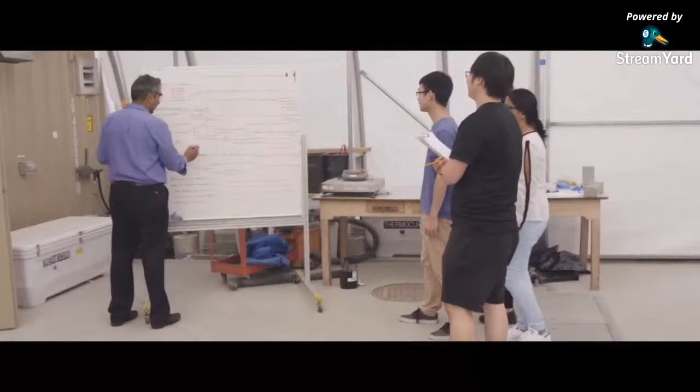Rishi joined the civil engineering program at the University of Victoria as one of its first hires and brought with him a wealth of engineering and teaching experience. His efforts were quickly recognized as he received some of the highest teacher ratings in the faculty and was presented with the faculty's Teaching Excellence Award in 2015. He has served as director of the undergraduate program in civil engineering since 2016.

One of the things that I've tried to do is have many undergrad students hired within my research lab, so it's not just fundamental research, but something that's applied and used in the field.

Dr. Gupta had a very great teaching style. I would never forget his class. It was second year civil engineering materials, where we had a lot of time in the lab, a lot of hands-on experience there. It was an experience I'll never forget.

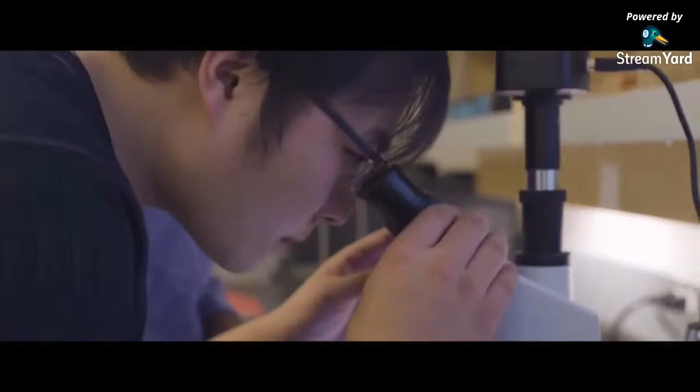He is recognized across the nation as a leader in academia, inspiring young minds to reach for more and continually challenging themselves. Rishi's outreach to elementary and high school students has helped foster greater interest in engineering from youth, and he serves as a committed steward of diversity and inclusion in the profession.

In 2012, he was recognized by the Women in Engineering chapter at BCIT for his support.

The issue is also at the back end, having children between kindergarten and grade 12. We need to promote science and engineering at that level. We need everybody: we need women at the undergrad level, but we also need women to go to grad school, and we need women to come back and be role models in the teaching profession and in the engineering profession.

Engineers and Geoscientists BC is proud to present its Teaching Award of Excellence to Dr. Rishi Gupta.

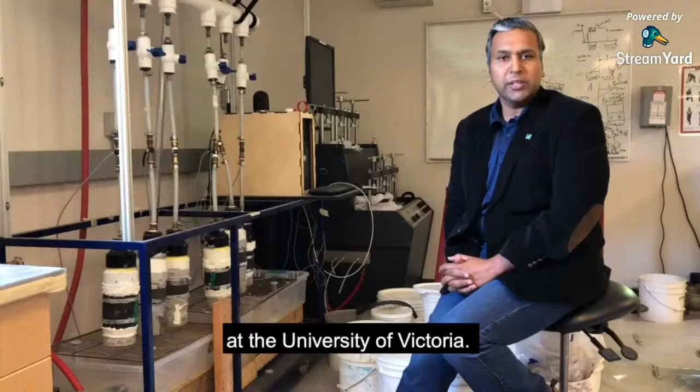Hello everyone, my name is Dr. Rishi Gupta. I work in the Department of Civil Engineering at the University of Victoria. First of all, I sincerely hope that all of you watching this video are keeping safe during the pandemic.

The one project I'm extremely excited about at this moment is focused on coming up with a novel type of coating that can be applied on different surfaces so that the novel coronavirus cannot stick to them. The one application we have in mind is for wash basins. We are hoping these wash basins can be deployed at public places, especially at the entrances and exits of malls, schools, and recreational facilities. I hope by the time we finish this project, we can make Canadians a bit safer than they are.

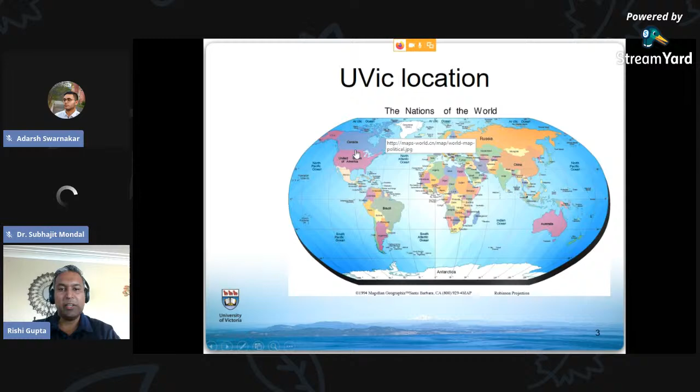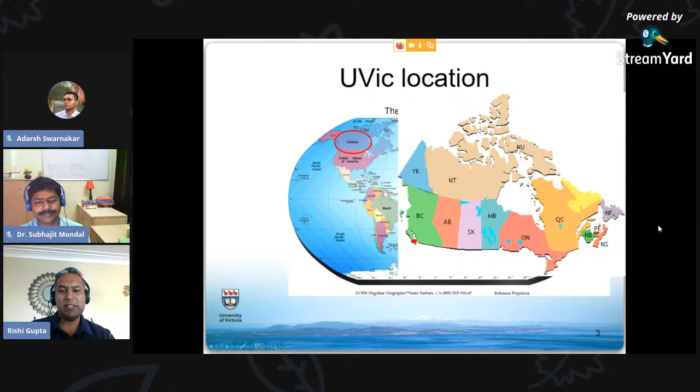I wanted to give a quick snapshot of where we are located. Of course we share a pretty long border with the United States. If I zoom into this a little bit, the University of Victoria is located in British Columbia, and we are actually at the southern tip of Vancouver Island. So that's the location of where we are. With that little geographical mapping of UVic, I'll begin with the presentation.

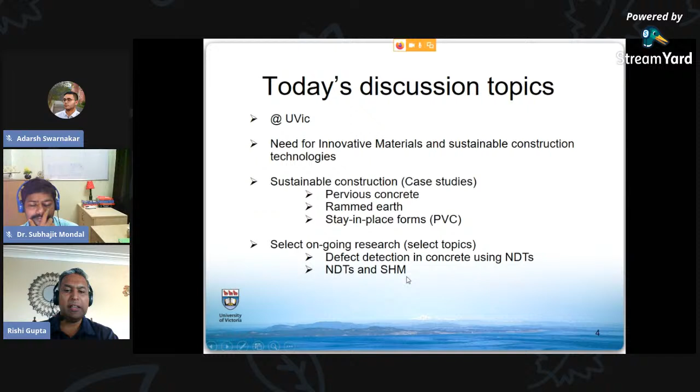I have a couple more slides to tell you a little bit more about University of Victoria. We'll get into what exactly is the need for innovative materials and sustainable construction technologies. Then I have three case studies that I have cherry-picked for the presentation today: one on pervious concrete, or porous concrete, one on rammed earth, and one on a SIP system - a stay-in-place concrete forming system. Hopefully, if we have time, I want to try and keep this to about 45 minutes, I'll get into a little bit of non-destructive testing and structural health monitoring.

Let's talk a little bit about University of Victoria while I have the opportunity. UVic is located in the capital of British Columbia, in Victoria. We have roughly about 20,000 students on campus, and a very good graduate and undergraduate program. Within engineering, we have several disciplines, but we of course have civil engineering included in the list as well - civil engineering was actually one of the newest programs to be added at the University of Victoria. And while I have the opportunity, I want to recognize that we've actually had several NIT Rourkela students coming to Canada over the past few years.

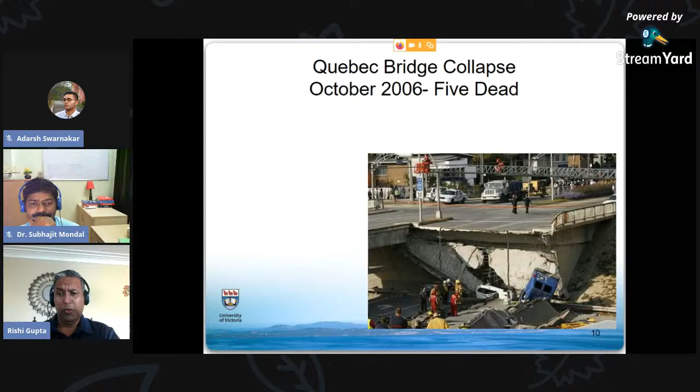This particular one I really like, because there was a lot of controversy behind why this bridge collapsed in Quebec, Canada, in 2006. The mystery is that blame was laid on poor construction, poor design, and deterioration of the bridge, and so on.

Then we have, many of you may have seen these photographs, the Minneapolis bridge in 2007. There were quite a few people injured in this, 145 people, and 13 people died in this collapse.

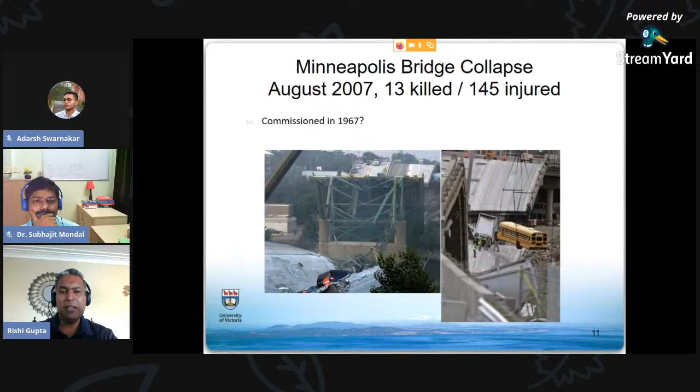So we need to address some of these issues.

If you look at the financial side of things, many of my numbers are actually outdated. I don't expect you to read all of this, but I'll point your attention to one statistic: the infrastructure deficit in Canada alone for bridges is estimated at about $8 billion. I think this number has gone up over the years, but if Canada had to fix all the structurally deficient bridges, we would need about $8 to $10 billion to do that. So that's a pretty hefty number.

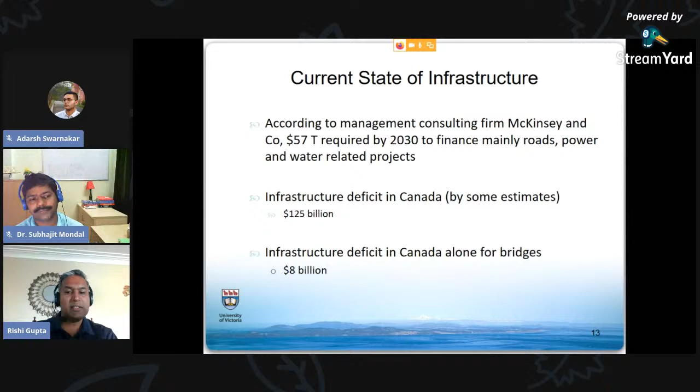I also have this statistic for India. This was the finance minister back in 2013, Mr. Chidambaram, and he had put the infrastructure deficit for India at $1 trillion. These numbers are very staggering, and we as civil engineers need to think about, first, what's going wrong; second, how do we find out what's wrong; and third, how can we in a very sustainable fashion fix some of these issues?

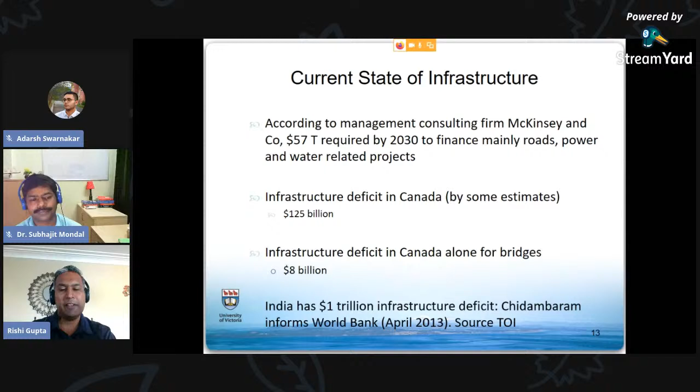So with that, I want to move on to what exactly is the solution.

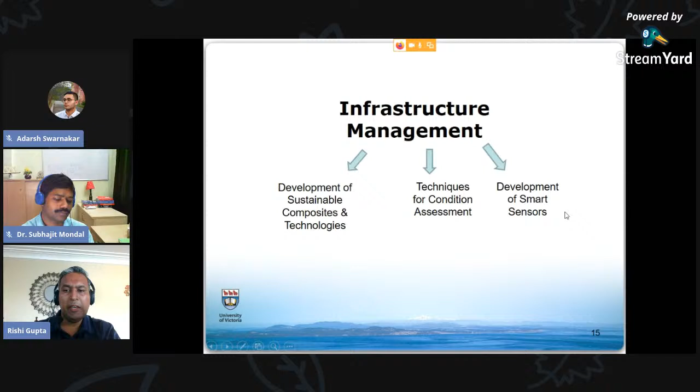Finally, we are doing a lot of work on smart sensors. How can a sensor do more than one thing? So if there's a sensor measuring strain, in addition to strain, can it actually monitor anything else for us? There are interactions between these.

Many of you may have heard of LCA, often referred to as LCC, life cycle costing or life cycle assessment. We do a bit of work on this, not too much. Finally, where LCA and development of smart sensors interact would be called structural health monitoring of both new structures and repaired structures. There's a light line showing different interactions.

I won't spend too much time on this. In today's topic I will try and focus on sustainable construction technology, which will be the main focus of the presentation. If I have time, we'll touch a little on structural health monitoring as we move forward.

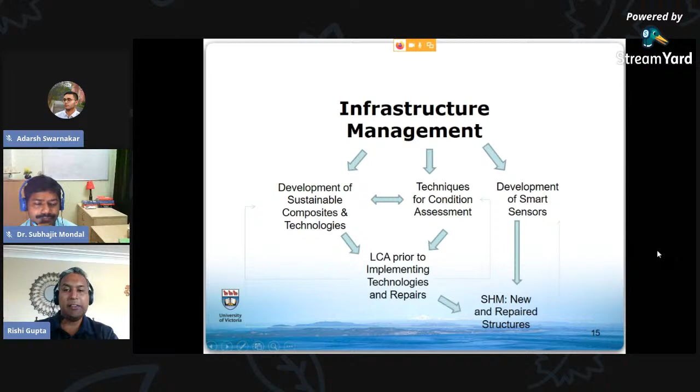So let's get into the main substance of the presentation today, and we'll talk about construction technologies. Like I mentioned before, I have three case studies that I cherry-picked for you. These are the three case studies where I was personally involved, personally leading these projects.

So these are really close to my heart, and hopefully you'll find them valuable as well. So let's begin with the first one.

This is pervious concrete. I would like to begin with this photograph that I took a few years ago when I used to live in Vancouver.

I should try and explain first of all what's going on here. This is a view outside my home. This photo was taken, I think, in February.

You can see a little bit of snow in my front yard. The tulips are trying to pop out, so that tells me it's end of February, early March.

But what's going on in the background is you see the asphalt road. So we as engineers, and we as civil engineers, we love for things to be very neat and tidy and clean. So of course we love clean asphalt surfaces.

What we have next to it is the shoulder, which has been compacted with gravel. So again, a little bit of permeability, but not that much.

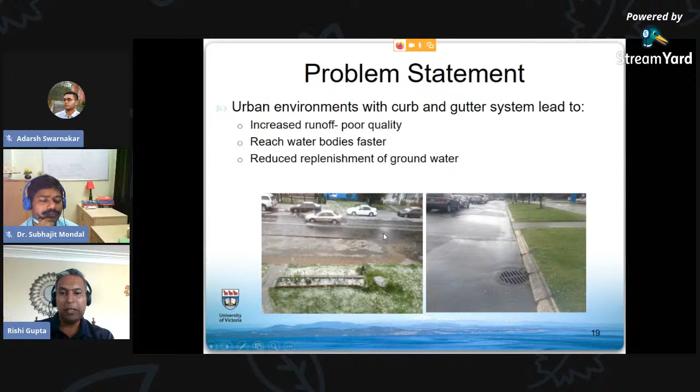What if it was permeable, and could that change this runoff that's going into the stormwater drains? So this was the focus of this particular project that we were working on.

Pervious concrete, also known as no-fines concrete, typically has between 15% to 30% voids. Since it is porous, it definitely will be lightweight.

And we are talking about sustainability here. So if you're using 20 to 30% less material, of course your material will also become sustainable at the same time.

If I ask someone who's manufacturing this, they will talk about the percolation capacity of this product, and they may give you a number like 30,000 millimeters per hour of infiltration capacity.

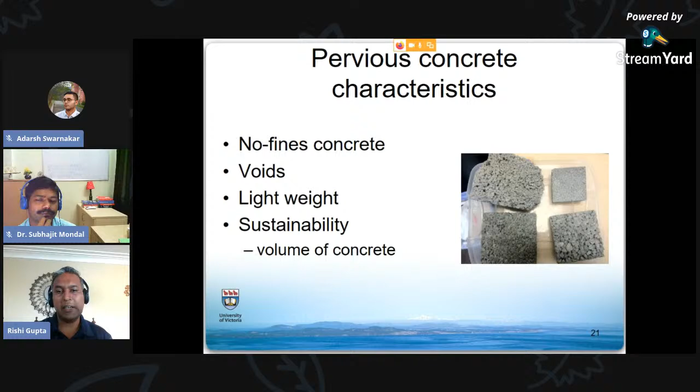So one of the things that we have been working on is that the percolation capacity should not be the capacity of just the pervious concrete. It needs to be site specific, and it actually needs to be for the entire system.

So you cannot forget the subgrade where this material is being placed. Clogging is a major problem.

So the photograph I showed you with a very high sediment load—if you have that kind of stormwater going through a pervious concrete, your pores are going to block very, very quickly. Abrasion resistance is a problem.

So because we don't have fines, the amount of paste is actually less in pervious concrete.

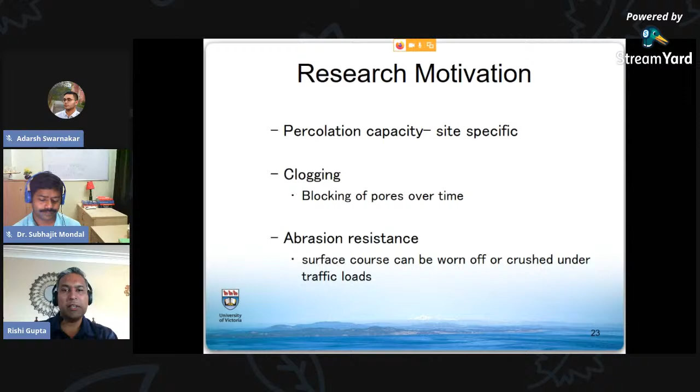And what that does, it actually can allow the aggregate particles to dislodge from the surface. And that particular phenomenon is also known as raveling of concrete.

So the site that we chose—we often laugh about this, that's not a typo—we call Vancouver 'Raincouver', because typically the average rainfall there is more than 1,100 millimeters per year.

That's quite a lot of water coming onto impermeable surfaces. This is a plan view of one parking lot, maybe 30 or 40,000 square feet, and on this particular site there were about 5 or 6 such parking lots. Imagine the amount of rainfall, 1,000 millimeters in a year, falling on this area, and everything being diverted into stormwater drains. What if we could change that?

So we picked this little site, about 1,000 square feet. We picked it because it was exposed to straight moving traffic, turning traffic, and 3 stalls of standing traffic. The idea is that the type of traffic, or whether it's turning or not, can play a major role in the raveling of the aggregate. If the tire is turning, the aggregates have a big tendency to dislodge from the pavement.

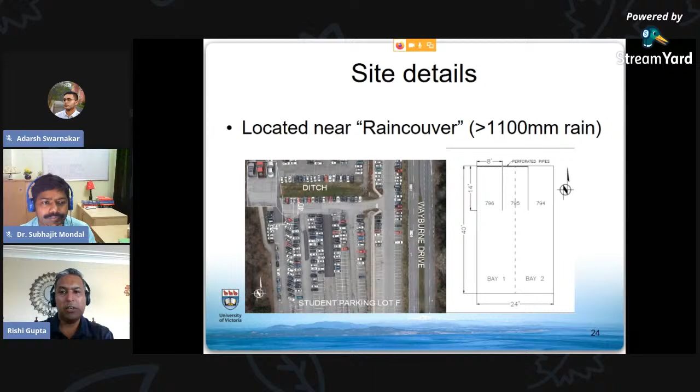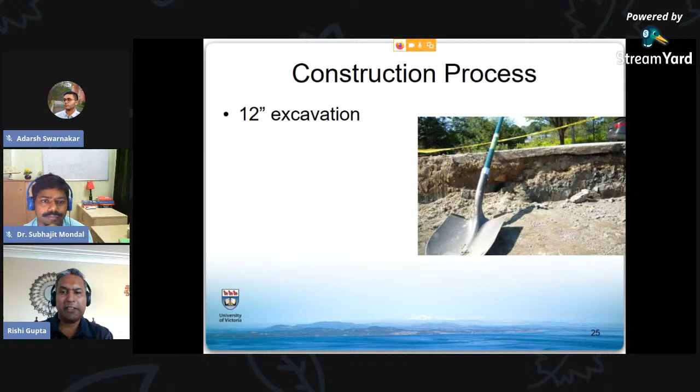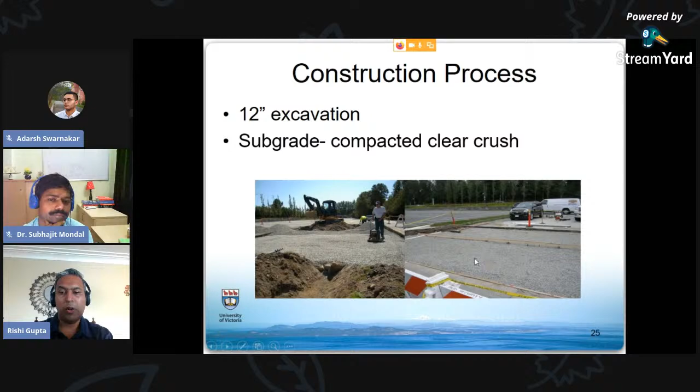So this is the site that was selected. I'll show you some quick photographs. I love how fast this project was completed. There were 12 inches of excavation on site. Here, clear crush or gravel is being placed and compacted, about 6 inches of the 12. This is the completed compacted gravel on both sides.

And then here's my favorite slide, something new I learned about 7-8 years ago, about how you compact and finish pervious concrete. In this photograph, what you see is not gravel, it's pervious concrete in a fresh form, and this is a roller screed. I should spend a minute explaining this.

This is actually a hollow tube. It can be closed from the 2 ends and has handles to hold them. In the background, you can see it's motorized, connected to a motor. One gentleman holds this end of the screed, another holds the other end, they turn on the roller, and the tube starts rotating as the 2 people drag it along to finish the pervious concrete.

Depending on the compaction you need, they fill up the tube with a certain amount of water. If you wanted more compaction and wanted to make the screed heavier, they'd fill it quickly with water, close the 2 ends, and repeat the operation. This was very interesting, very fascinating. In one operation, you get compaction, screeding, and some sort of finish done at the same time.

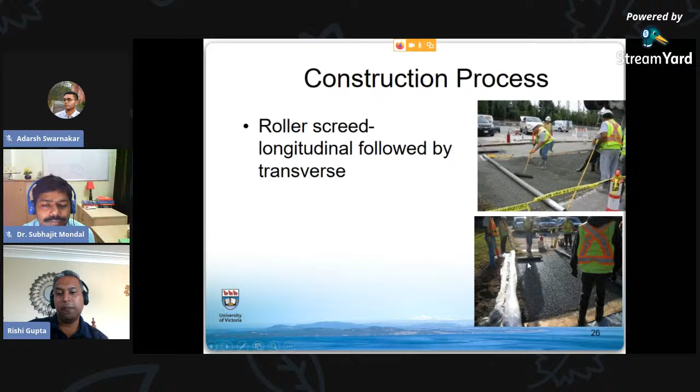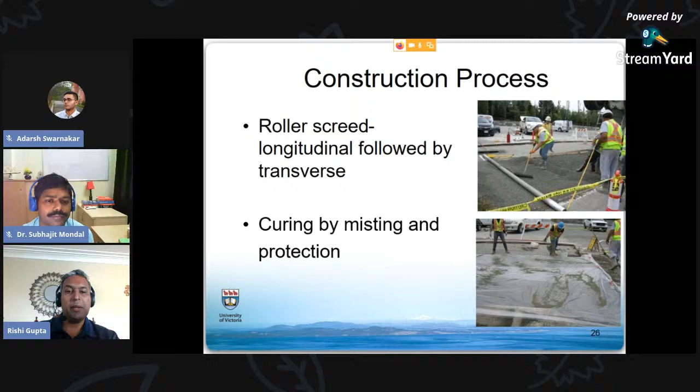In the second video, this is a smaller screed. Once you've done your longitudinal screeding, you bring a smaller one to get the kind of finish you need on the surface. Very interesting. Then we left it for curing and misting for at least 14 days. In this particular site, we actually let it cure for a good 28 days because we had the luxury to keep it closed for that long. If this was an active roadway, you perhaps might not have that luxury.

So keep this thought in mind and think about what would happen if the runoff came through this media and then tried to enter groundwater. You'd have a lot of contaminants like hydrocarbons from the vehicles standing on the parking lot. The hydrocarbons come from the gas, the diesel, and other stuff coming out from the cars. Hydrocarbons can also come from asphalt itself, and this becomes the perfect filtration bed for stormwater.

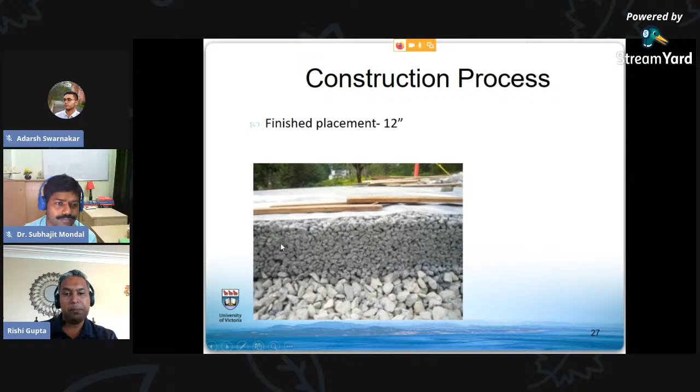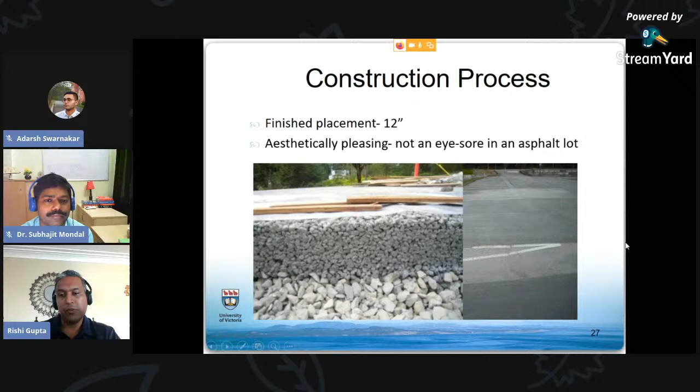So this is the finished site. As you can see, this actually blended very well with the rest of the asphalt, which was a great thing. This pavement did not stand out, which was actually a good thing for the rest of the parking lot.

So in this particular project, we focused on many different aspects. There was the hydrological aspect, the environmental aspect, and the structural or material properties we were interested in investigating. So I won't spend too much time.

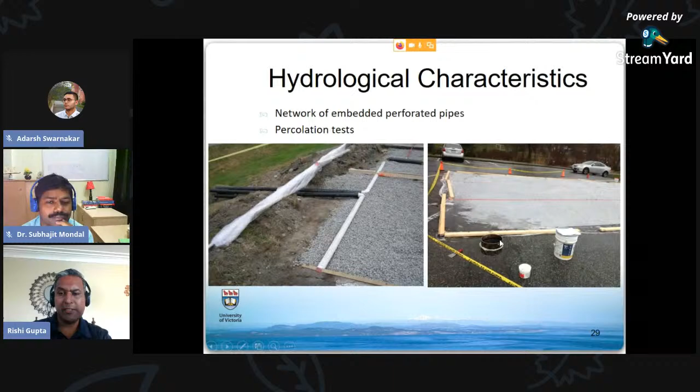We actually had an embedded pipe system to monitor the amount of water being collected. We could use these pipes to sample the water to see what the quality of water was. We did infiltration tests according to ASTM standards on this project.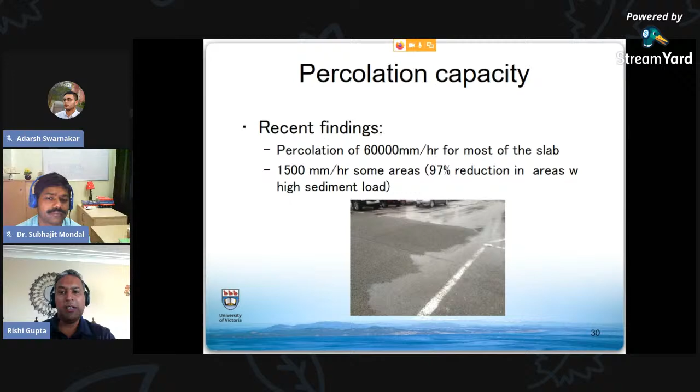This brings an interesting concept: perhaps you don't have to replace all the impermeable surface with permeable surfaces. What if you could have certain parts of your concrete or asphalt pavements replaced with permeable surfaces? That's a concept I'd like to leave behind with all of you.

We did some COD measurements on the project, and we did density measurements. You'll see that the compressive strength of these samples was rather low. The product we were working with, we were expecting more like 10 MPa, but I attribute this issue to the fact that at the time there was no standard that spoke about how this should be cast.

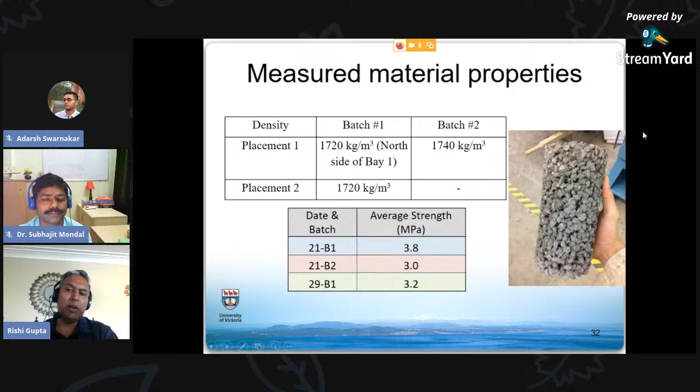So what level of compaction? How do you actually make this? That was an issue. I think the low compressive strength is attributed to the fact that there was no standard explaining how cylinders should be made for porous concrete.

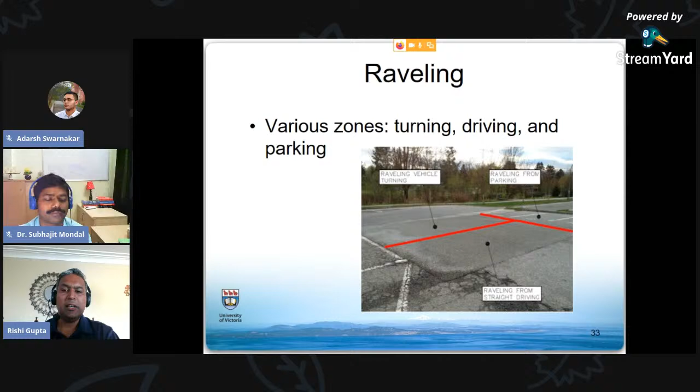We monitored the raveling. The good news was dislodging of aggregates did continue for the first month and a half, but after that it significantly dropped, which again was a good sign for this project. So with that, I'll move on, keeping an eye on time as well.

I'll move on to the second case study, which is on rammed earth, or what we also call cement stabilized soil. So within the sustainability angle, I'm not sure how many have heard of this concept that was very popular a few years ago, called the 100-mile diet.

The idea was, when we eat something, if we wanted things to be sustainable, if we ate things that grow within the 100-mile radius—or maybe it was the diameter, I can't remember—our eating habits can be sustainable. The same analogy applies to construction. If we select materials that aren't hauled over very long distances, our construction methodology or structures can actually be more sustainable. So use local materials; that can definitely make your construction practices more sustainable.

So this is a photograph of construction happening in Tibet. You can see there is basically soil in the background, and the people come together—it's usually a community effort. They take the soil, and you can see on top, this is of course a very labor intensive process.

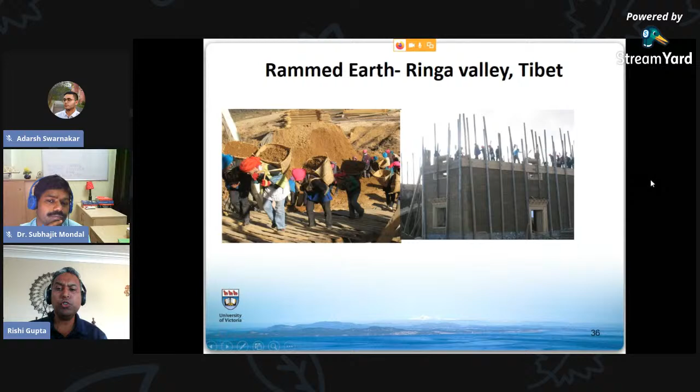The soil is dumped into the forms, and you can see the height of the form is not that much, but they fill up the forms, compacting the soil to make it nice and dense. I call this a traditional form of construction. The walls are typically very, very thick.

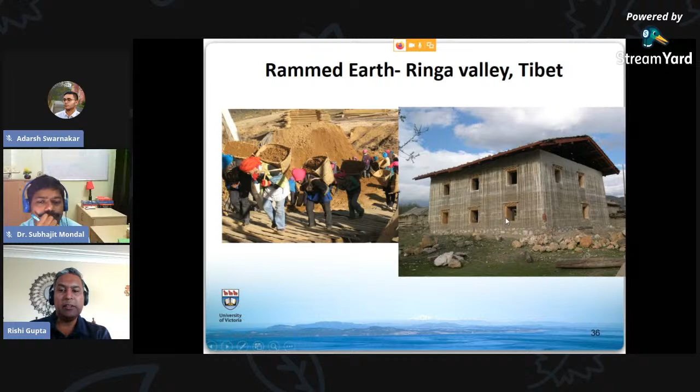The idea behind these very thick walls is that you can utilize the thermal mass of the wall for offsetting the heating and cooling during the day. For example, outside in Tibet at night it may be very cold, but during the day these thick walls have absorbed a lot of heat, and they'll start emitting that heat indoors, keeping the house warm. The same phenomena is reversed in the mornings, where the outside starts heating up and the walls have cooled down overnight.

So we were working with this material. One of the structural engineers came to us to say, when we are using rammed earth for walls, we don't know what the bond strength is of the rebar. We don't know whether rammed earth should be treated as concrete or as masonry.

This is something we were trying to answer, but I'll back up a little to explain how we do modern day rammed earth construction. We basically bring a compressor, which has anything between 60 to 100 psi of pressure. We connect it with hoses, and the other end of the hose goes to what we call rammers.

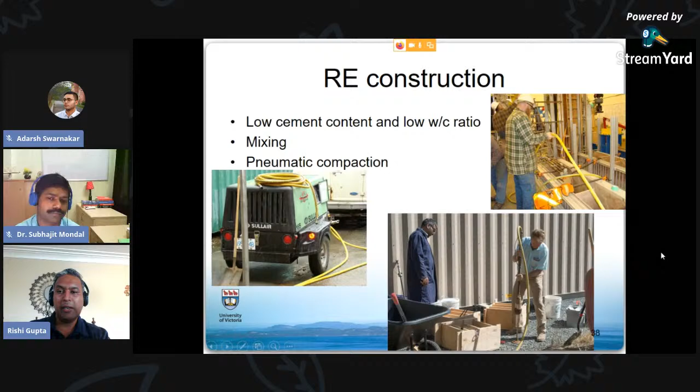So this is happening in my lab. We are making different samples here, trying to understand the structural characteristics of rammed earth. Here is Gitanjali, one of my students, trying to find out what the form pressure is. So if I have rammed earth going inside, what would be the pressure on the formwork? How do we design formwork for rammed earth?

The one thing I forgot to mention for rammed earth is that the way we do modern rammed earth is we put insulation in the center, with rammed earth on the two sides. So the exterior would have rammed earth, and the interior would have rammed earth. So now you benefit from both aspects: you have insulated walls, and at the same time, walls which can offer you thermal mass.

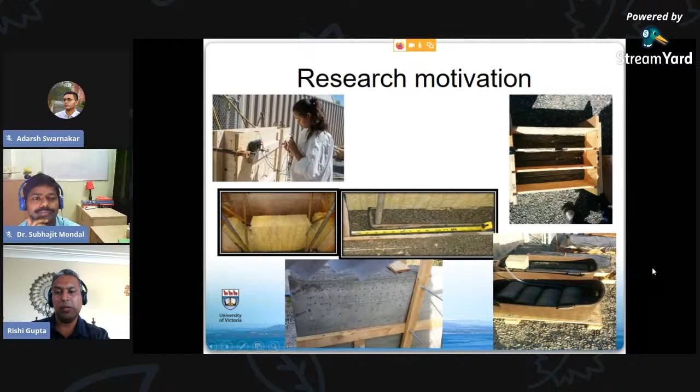So again, I won't spend too much time. We actually constructed a mock wall and did a lot of non-destructive tests on it. I'll show you some photographs towards the end if we have time. This is just a full wall that was constructed about 10 feet tall. You can see how it has this nice texture to it.

The reason for this beautiful texture is that when the wall is within the forms, we usually put about 6 to 8 inches of wet material and compact it down, then another layer of 6 to 8 inches and compact it down. So when this material is within the forms, you can't actually see it. And because you cannot see it, it gives you this natural, not very straight texture, which people love for architectural purposes.

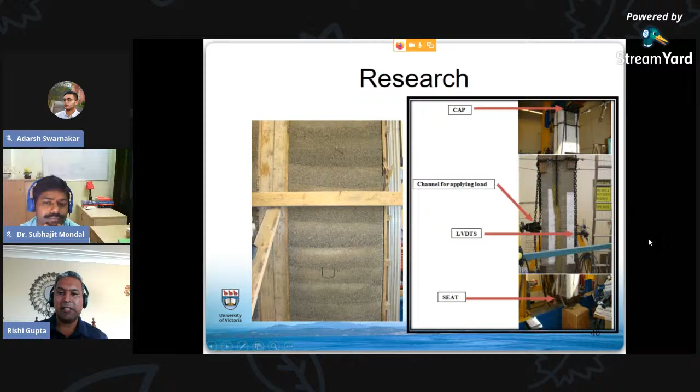So I won't spend too much time. There's actually an out-of-plane bending test going on for a full scale wall. This was done at my previous workplace, BCIT, and it was a very exciting project that we finished back then.

With this, I'll move on to my third case study, the last one I had planned for today. Time permitting, for those who are waiting for dinner, I'll let you all go. I usually end up in such awkward situations, presenting at conferences right between lunch and all the audiences, so audiences hate me and say, can you please finish very quickly?

You may have heard about the stay-in-place forming system. Let me explain this a little more. The idea behind a stay-in-place forming system is that you erect the formwork.

Typical formworks are made out of timber or wood; in India, we use a lot of steel, for example. The idea for a stay-in-place system is that you don't remove your forms. The forms actually become a part of the structure.

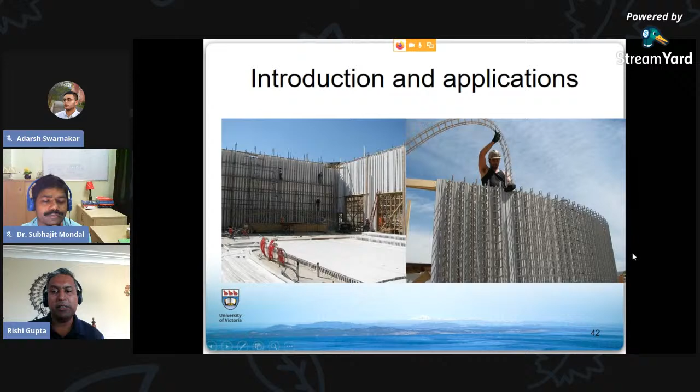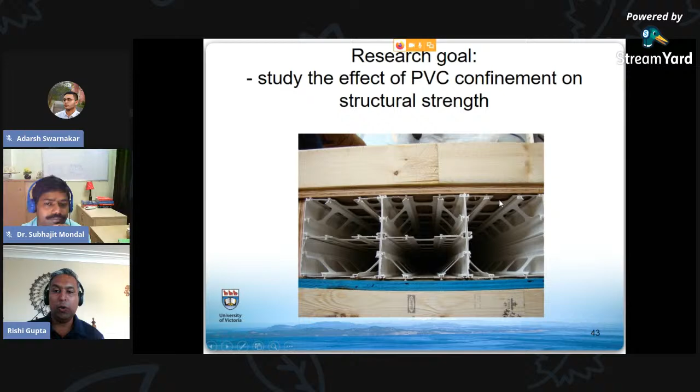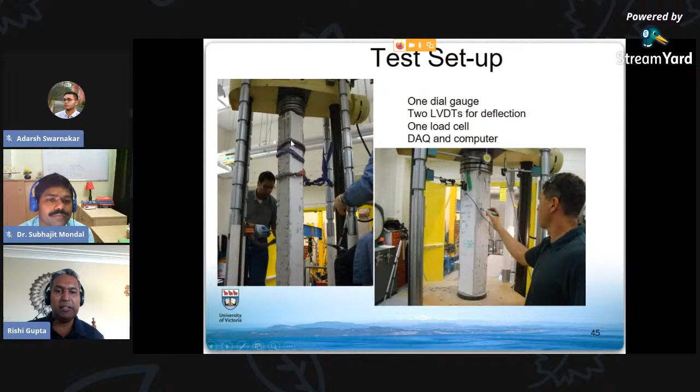You can see the concrete is completely encapsulated in PVC, and we tested it for pure axial capacity. We had columns ranging from 20-inch height to 72-inch height. This has been normalized or compared to control concrete. So if your control concrete had this compressive strength along the horizontal axis, all the other PVC-encapsulated systems had, let's say, 20% more, 5% more, or 10% more than the control concrete.

So with the exception of one configuration, which we attributed to some issues with testing, all the other columns had a higher structural capacity as compared to control. So this was actually a little bit exciting, very exciting.

The idea that a very low modulus PVC - PVC has an elastic modulus of, let's say, 5 GPa or less, while your concrete has an elastic modulus of 30 GPa - and the idea that something so low modulus can actually give you confinement and an increase in strength was truly astonishing. We don't have much time, but there were other reasons we believe attributed to the high strength.

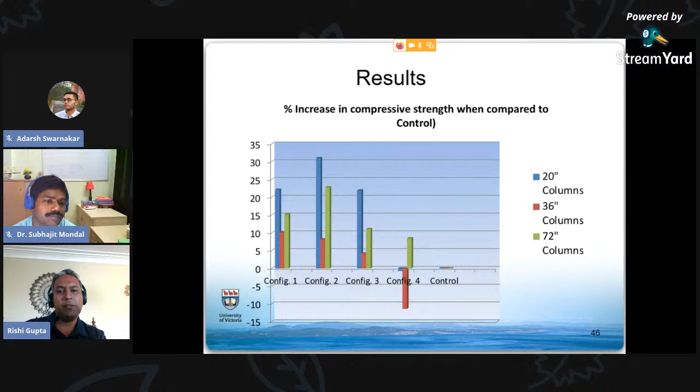We also attributed it to the fact that because the concrete was completely encased in PVC, the moisture did not evaporate very quickly from the concrete. So very good hydration, or complete hydration, could take place within those columns.

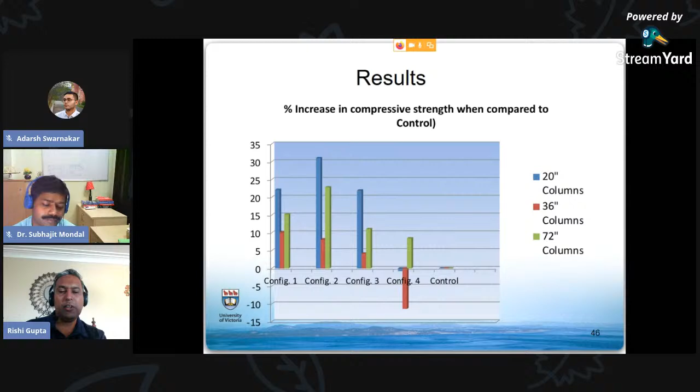Truly interesting results. I think you're going to like the next slide that I have, which is actually a little bit more graphic. I call this the secondary benefit.

For example, for the US Air Force in Florida, what they were thinking about was what if this concept could be used for making bunkers for soldiers. So if there's a blast that happens on the outside, the structure may fail, but there'll be no pieces of concrete that fall on the soldiers inside the bunker.

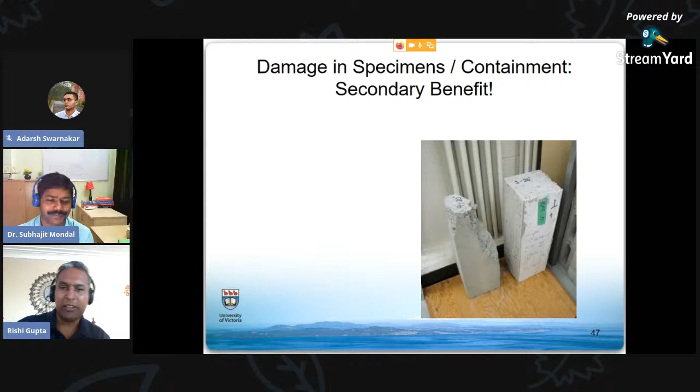So I'll move on to structural health monitoring, SHM - I'll use this acronym a few times. And then we have non-destructive testing, or NDTs. The reason I've included this in my sustainability presentation is that by using structural health monitoring or non-destructive testing, we can actually extend the life of our structures.

If you have a bridge that has been in service for 50, 60, 70 years, and you don't know how long it's going to last, that's a problem. If somebody comes and says, I think this is beyond the design life, we should decommission this bridge - but what if somebody could go in and truly find out the condition of that bridge and say, you actually have another 15 years left in the structure.

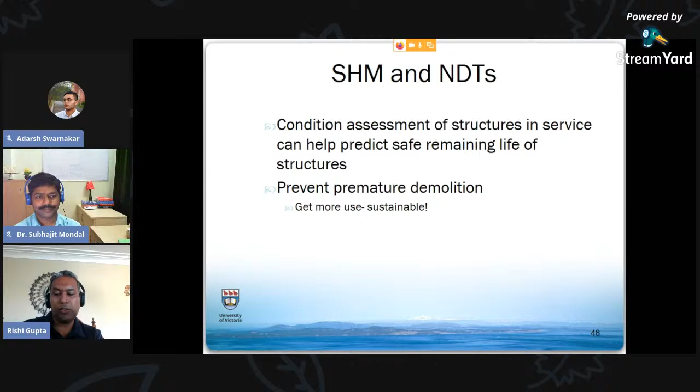So that to me is sustainability, because you have deferred the need for reconstruction, deferred the need for new materials, and extended the life of the materials by a certain amount of time. That to me is going to be the future for several years to come, where we need to be safe, but at the same time get more out of our structures.

So these are just some - I won't get into the very specifics, but hopefully you'll have an appreciation of some of the techniques. I'll show you a couple of projects I was involved in, during my time at the University of British Columbia. There are 2 projects I wanted to show you.

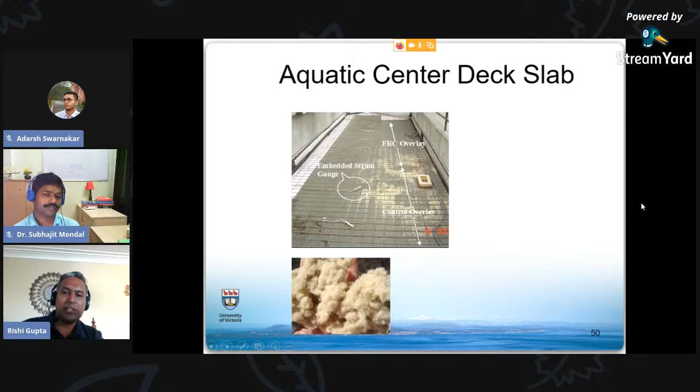This is a project where half of the slab had no fibers, and the other half was fiber reinforced concrete, using cellulose fibers. We were monitoring using embedded sensors - what you see here is embedded strain gauges placed at strategic points. We were interested in finding out the plastic shrinkage that takes place during the first few days in the pavement. This is back in the day.

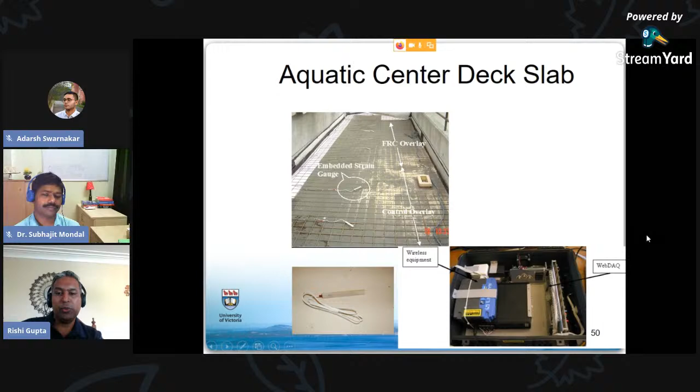This is almost 10 to 15 years old. This is how our wireless system used to look like back then, and this was a major accomplishment about 15 years ago. Not anymore. Now you have your little Raspberry Pis that can do a lot of computation for you.

One other project we did was a loading dock. This is a plan view of a loading dock, and we tried different combinations here. But the one combination I think is very interesting is a joint-free slab.

Many of you may know that whenever we make a concrete slab used as a pavement, we usually like to have a saw cut, cutting our slabs into smaller pieces so the shrinkage and thermal expansion is easy. If I don't have this saw cut, then because of thermal expansion and contraction, you'll have large cracks happening. But what we wanted to see was whether it would be possible to have a slab more than 6 meters long without a joint, but with fiber reinforcement in it.

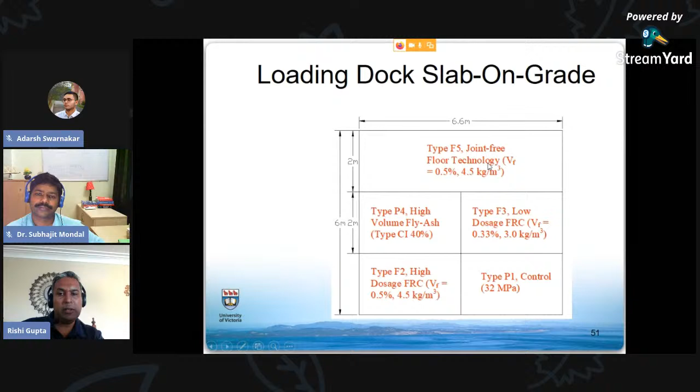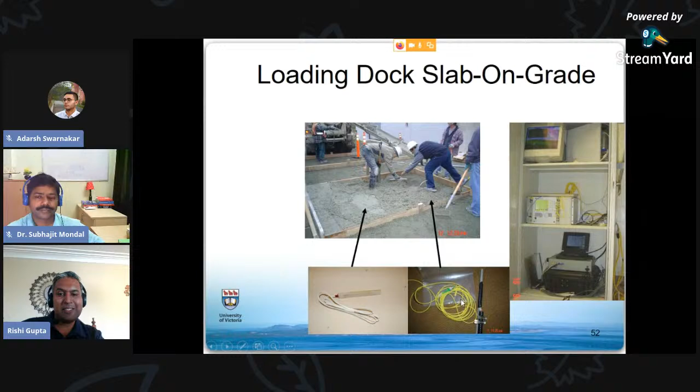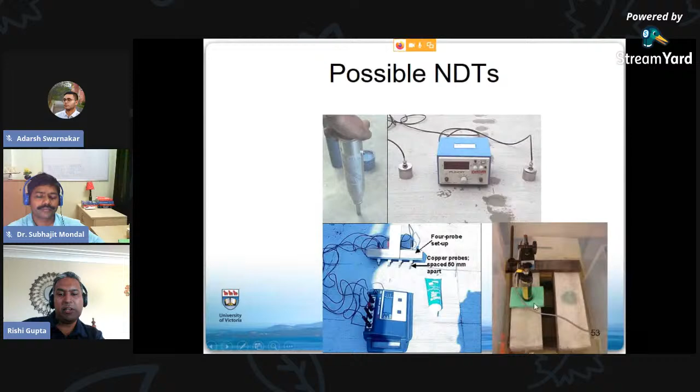So again, some photographs of construction. We used polypropylene fibers, a hybrid combination here. We had some fiber optic sensors that we used on this project in addition to electrical sensors, and we used a whole suite of NDTs - Schmidt hammer or rebound hammer, ultrasonic pulse velocity, electrical resistivity. We were measuring corrosion on this project.

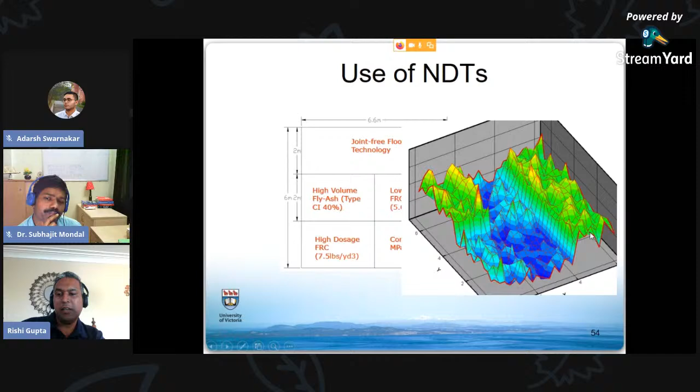What I wanted to show you was just one example of using NDTs. If you take this plan view, this particular slab is here, and the joint-free slab is actually right here. You can see that the small slab and the joint-free slab had very similar results. I haven't put the details of the NDT, but the results were very similar in the 2 or 3 NDTs that we used. This was very promising to see that if fiber reinforced concrete was used, you could perhaps have longer slabs which are joint free. So I'll take maybe 2-3 more minutes and then start wrapping this up.

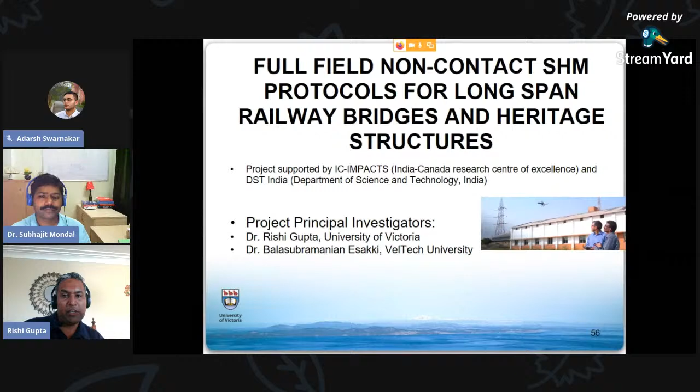So damage detection is something I wanted to mention. This is a project that was funded by India Canada IMPACTS, IC-IMPACTS. You mentioned Dr. Banthia was one of your speakers, and I know he presented details of IC-IMPACTS. This project was completed a couple of years ago, and the idea was to use drones for condition assessment of different structures.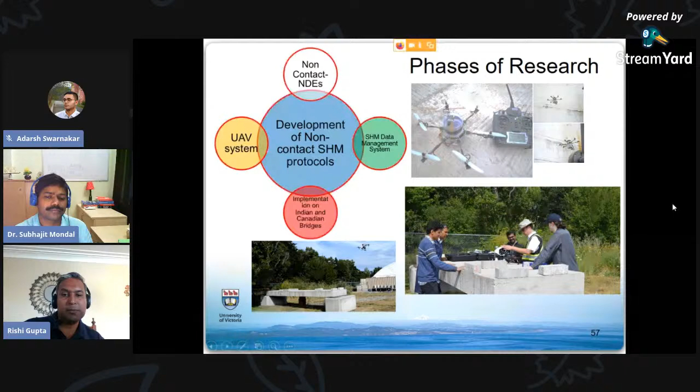Just 2-3 more slides to show you some photographs. What you can see here is outside my lab, we have a simulated slab, and a drone is actually being used to find out the condition of the slab. That's my co-PI, Dr. Bala Subramaniam from Vel Tech University, who was visiting us during this project, and our student team here who worked on this project.

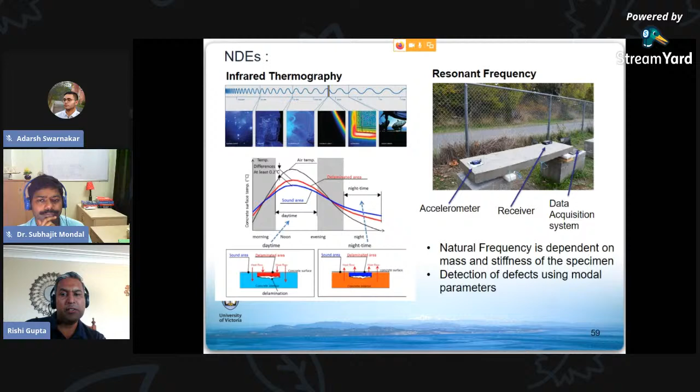I won't go into the details, but different instrumentation being used here on our simulated slabs. We've done a lot of work where we take slabs and install defects at certain known locations, then use non-destructive tests to find out whether first we can detect those defects, and second, how accurately we can detect them. We've also done some work using infrared cameras, and a whole suite of NDTs.

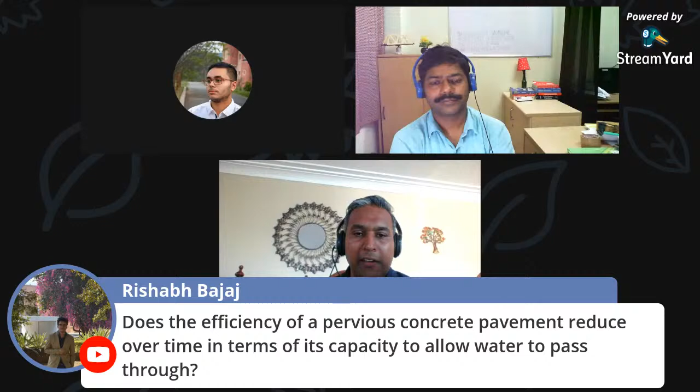And I didn't mention on the last question that with masonry, you need to plaster it on the inside and on the outside, which is very time consuming. With rammed earth, once you strip the forms, you have the beautiful architecture already. They also add pigments in rammed earth, so you saw some of those colors - you can have a reddish tinge, brown, black, whatever.

So our next question is by Rishabh Bajaj. Does the efficiency of pervious concrete pavement reduce over time in terms of its capacity to allow water to pass through? Good evening, Rishabh.

Long time, so thank you, Rishabh, for asking. Rishabh was one of our prime examples of a student from NIT Rourkela who actually came to UVic and did his MITACS internship successfully. Congratulations, Rishabh, and thank you for joining us. We should chat offline sometime, but you're absolutely right.

The efficiency of pervious concrete will reduce over a period of time. It's a big issue - if you have a big stormwater discharge with very high sediment loads, it'll block the pores in the pervious concrete. So it's definitely an issue. There are maintenance protocols in place where design standards suggest that every year you go and power wash the surface. But there's an issue with power washing - it may remove sediments in the top layer, but at the same time it pushes some sediments even deeper into the pavement. So that's an ongoing issue for sure.